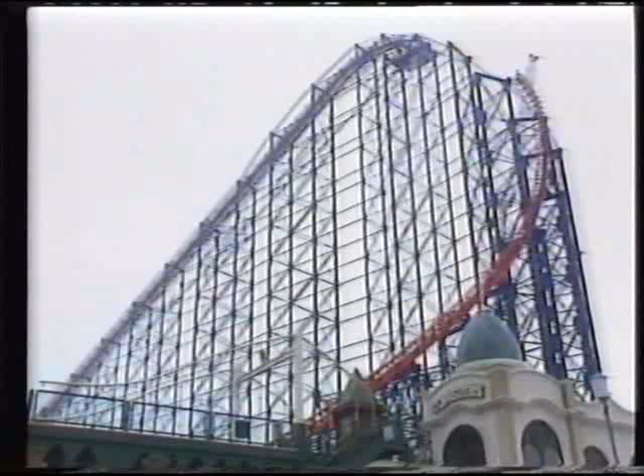It was one man's vision: to build the ultimate ride which would thrill millions. In the late 1980s, Geoffrey Thompson, managing director of Blackpool Pleasure Beach, vowed to show the world that his amusement park would scale new heights of daring. In 1994, the dream became a reality—the year the tallest roller coaster in the world came to Britain.

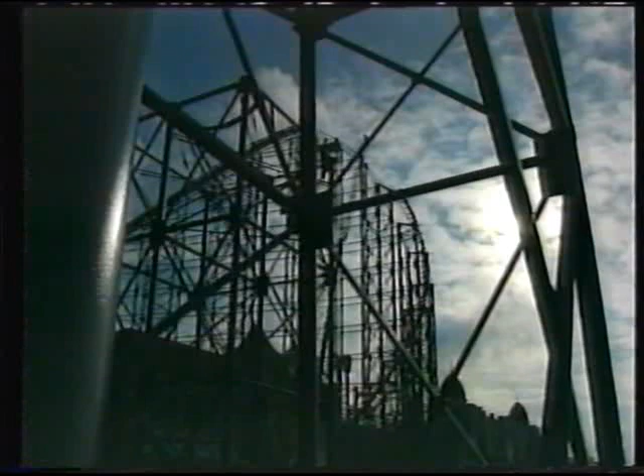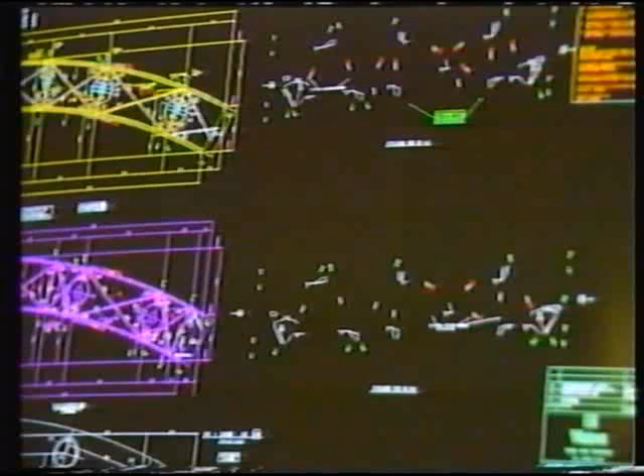Blackpool deserves only the best, and in the world of roller coasters, the finest are designed in America. Using the latest computer-aided design technology, Arrow Dynamics of Utah began creating a unique roller coaster, simply taller and faster than anything ever seen before.

With planning approval from Blackpool Council and the consent of the Civil Aviation Authority, the groundwork could begin. And who better to perform the first turf-cutting ceremony than Britain's tallest and fastest men—7 foot 6 inch Chris Greener and Olympic champion Linford Christie.

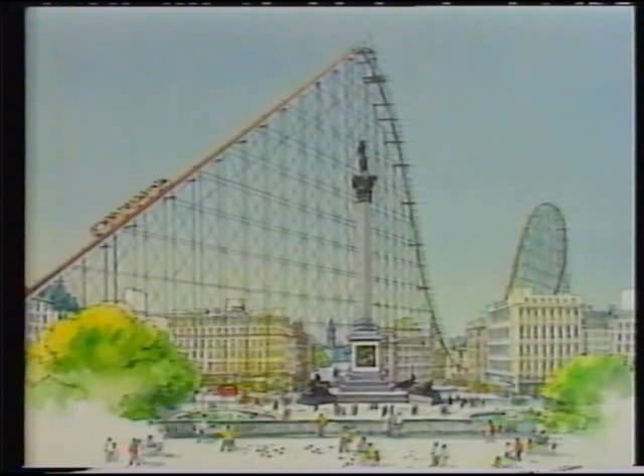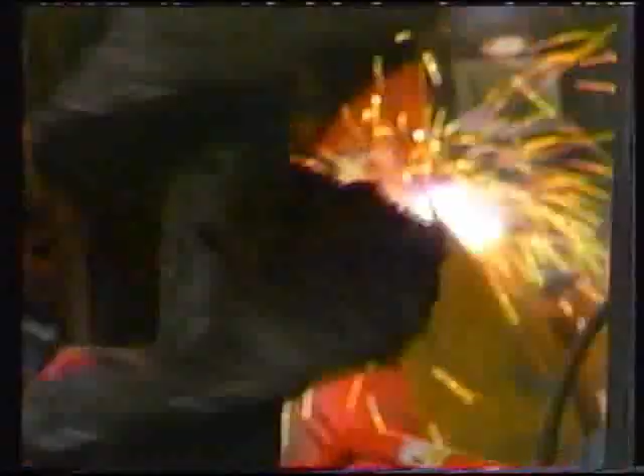The 235-foot roller coaster will be every inch a national landmark. This artist's impression shows how it would dwarf Nelson's Column. Prime Minister John Major, admitting on a visit to Blackpool he was inspired by the concept, said yes, he'd love to ride it. But first, the foundations had to be laid.

Other amusement parks have built their rides on greenfield sites. Here, it wasn't so simple. Somehow, the giant roller coaster's roots would have to be put down alongside the existing 140 attractions in the world's most ride-intensive amusement park. The £1.5 million contract for foundations was awarded to Shepherd Construction Limited of Manchester.

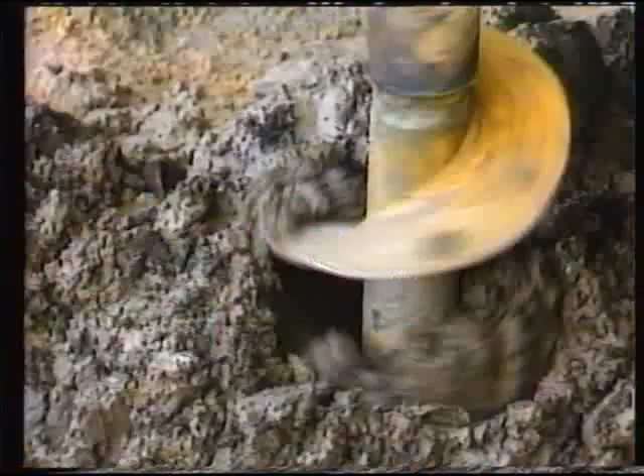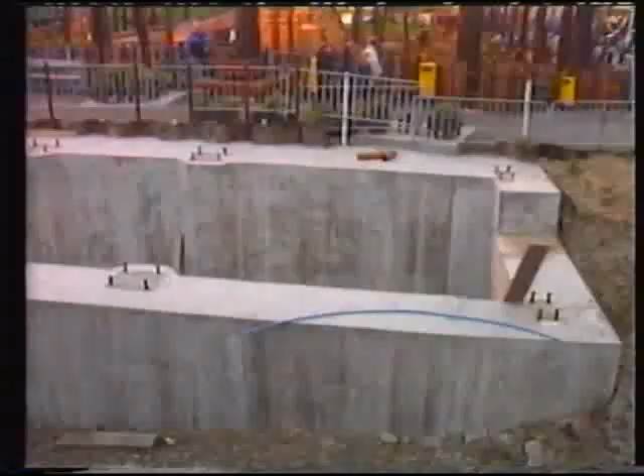The company had to overcome enormous obstacles to sink more than 300 piles. Even when they'd avoided water pipes and electricity cables, they faced the problem of sand. In some areas, they had to dig 45 feet down to find a firm base. The piles were reinforced with steel, and 5,000 tons of concrete was then poured in.

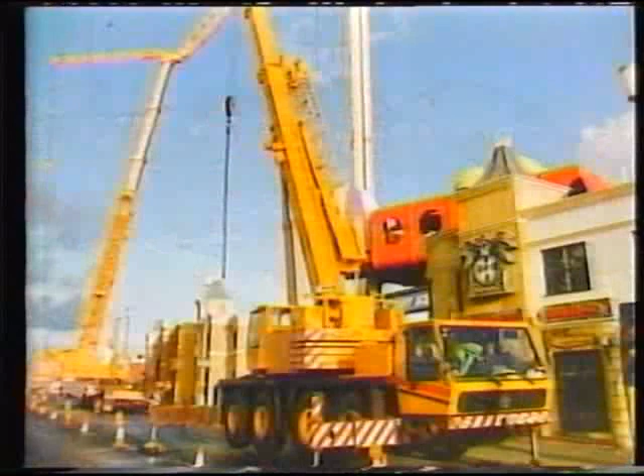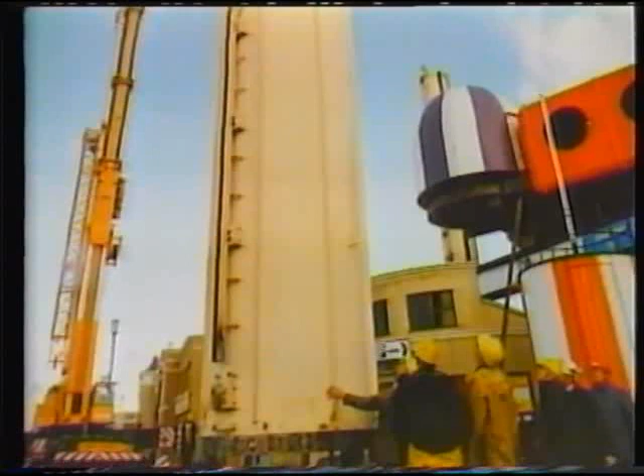Although everything possible was done to save existing attractions, the famous 170-foot Space Tower, erected in the 70s, had to be dismantled to make way for the ride of the 90s. But it has a new home at Frontierland in Morecambe.

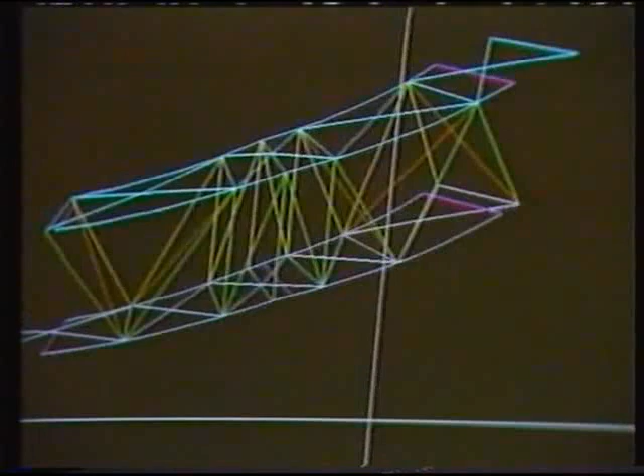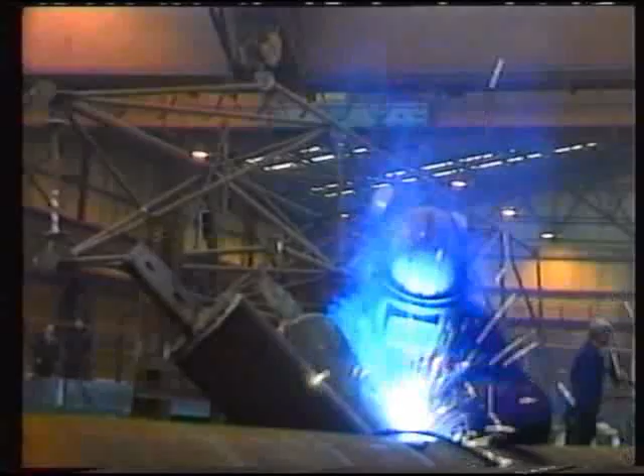With the design and route of the roller coaster agreed, work could begin on the superstructure. The 3D simulations and geometry calculations were supplied on computer disk by Arrow Dynamics and Manchester-based consulting engineers Allott and Lomax. These were then converted into working drawings, from which accurate plans could be drawn up, from which Watson Steel of Bolton could then make the 12,000 individual pieces of steel—2,600 tons in all, as part of a contract worth £6 million.

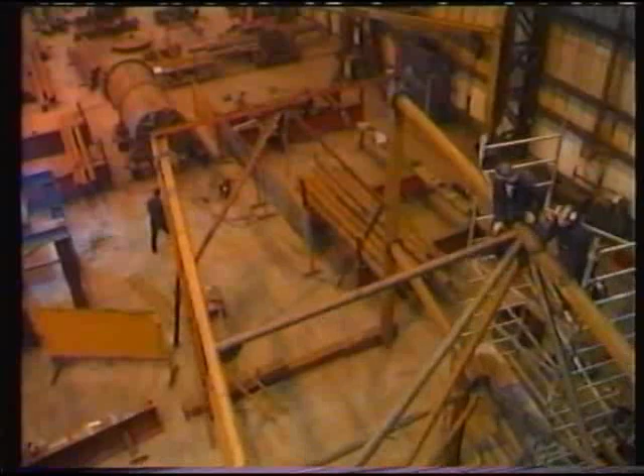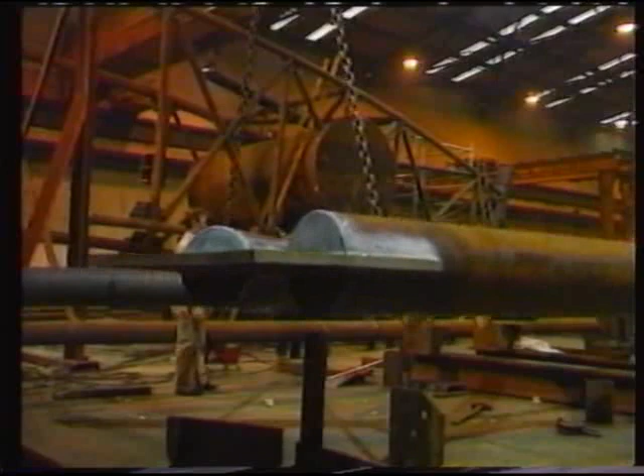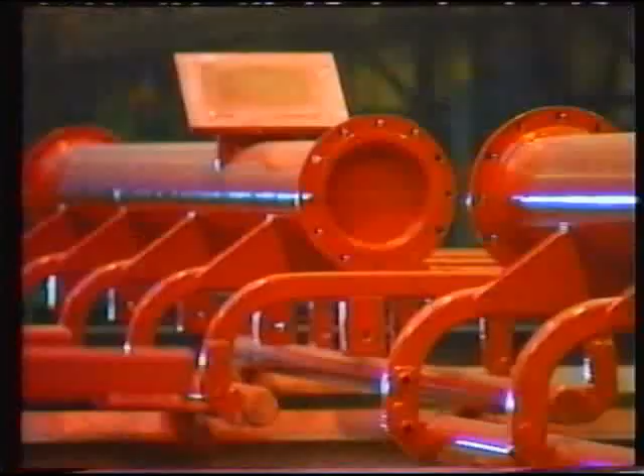The company's vast construction halls turned out enough steel which, if laid end to end, would have stretched 35 miles—from their Bolton factory to Blackpool itself. Here, vast monopod columns, tower legs, stanchions, turns and supports were made. All the steelwork, including the red track sections made separately in Southampton and Scotland, were then painted with high-performance protective coatings to guard against Blackpool's abrasive weather.

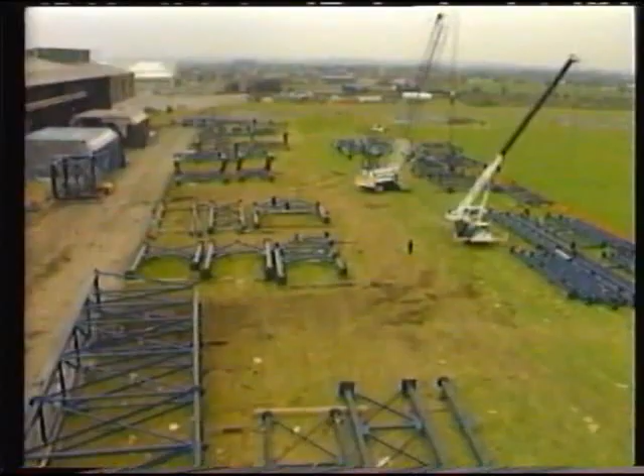There wasn't room at Blackpool Pleasure Beach to take all the steelwork at once, so it was delivered to nearby Blackpool Airport. There, the individual pieces of steel were assembled into larger sections. Gradually, like a giant puzzle, the structures began to take shape. Last checks were made before the steel could be loaded for final delivery to the Pleasure Beach.

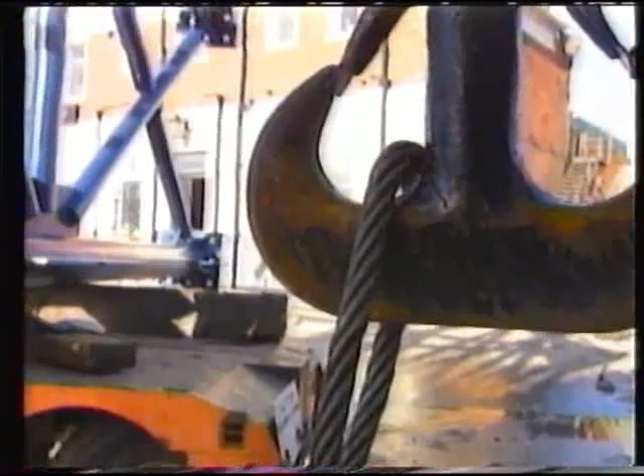The illuminations lengthened the summer season at Blackpool, and not until November are the gates of the Pleasure Beach closed to the public. Faced with the shortest winter closure of any amusement park in Europe, contractors had to erect the roller coaster in record time.

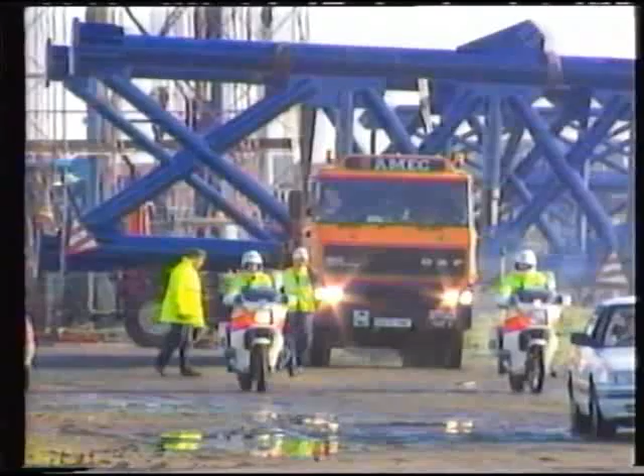Some of the biggest loads ever seen on our roads began to inch their way towards the Pleasure Beach. Police outriders gave each lorry an escort from the airport. They closed the busy promenade and planned alternative routes for Blackpool's busy traffic. The world's tallest roller coaster was on the move.

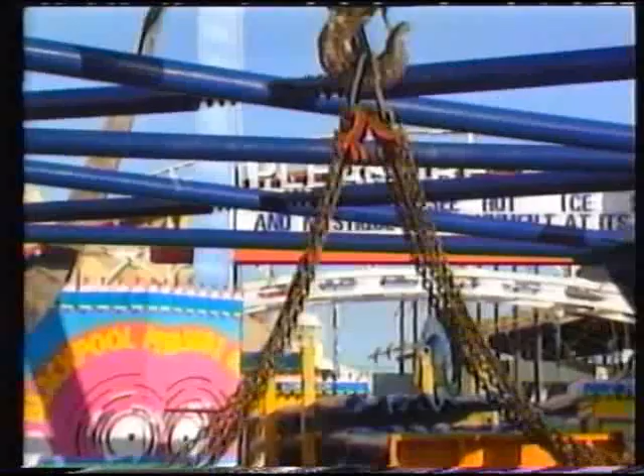A giant crane at 400 tons, one of the largest in use in Britain, was brought in to lift the heavier sections. Each was lifted in order and, with astonishing precision, was then lowered onto its waiting foundation. If any of these supports had been more than 20 millimeters out at the bottom, the track section simply wouldn't have fitted at the top.

Hour by hour, day by day, week by week, and in all weathers, the roller coaster grew and grew. It had to grow to live up to its new name, the Pepsi Max Big One. Blackpool Pleasure Beach announced a 5-year sponsorship deal with the American soft drinks company worth £1 million, believed to be the first ever sponsorship deal of its kind for a single ride.

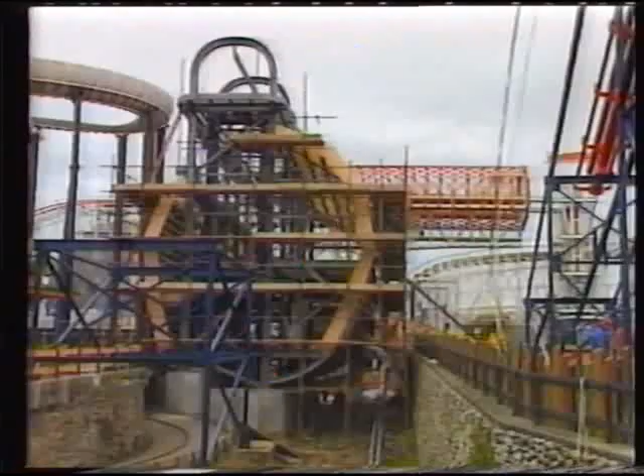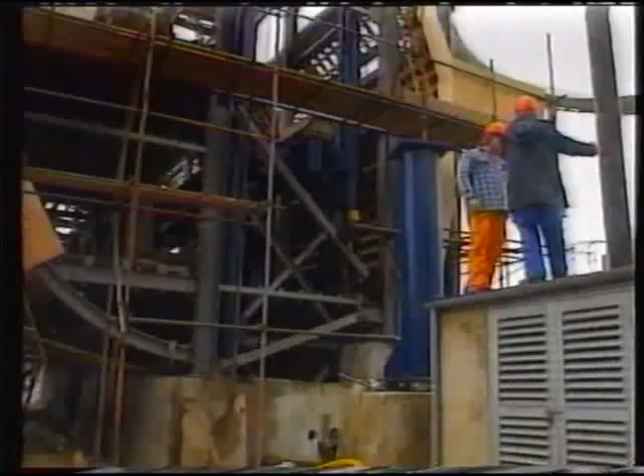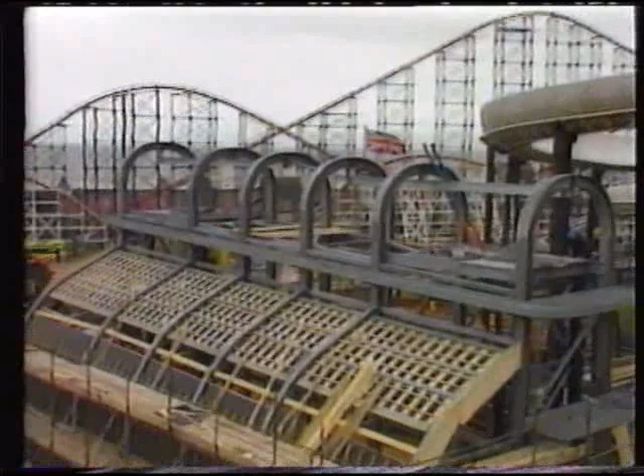Following the design route of the ride, engineers had to cut through the Big Dipper and the old roller coaster to ease the progress of their new neighbor.

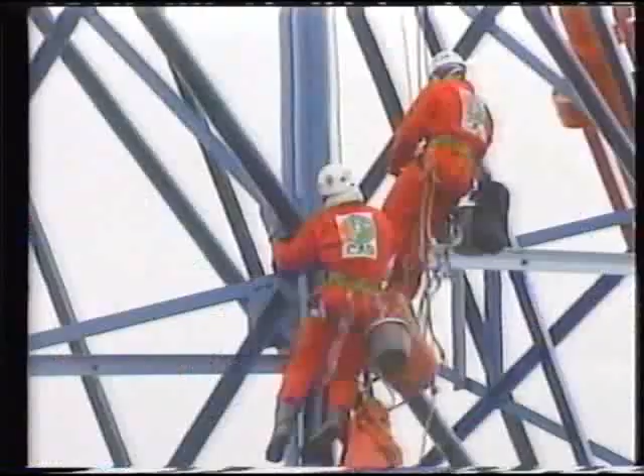Touching up the paintwork requires a head for heights. The world's leading roped access specialists were brought in to coat the bolts and make good any handling damage. Up to 5 layers of protective coatings would be needed.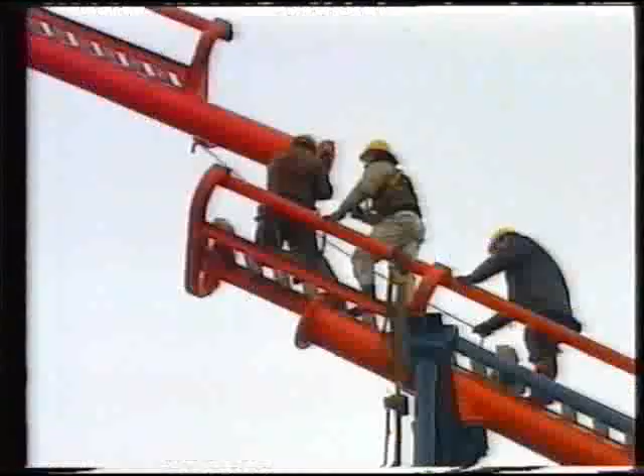As the winter season drew to an end, the activity intensified. Red track sections began to top the route of the tallest roller coaster ever built on this planet.

Geoffrey Thompson believes the Pepsi Max Big One is the most significant single leisure development in Britain since the construction of Blackpool Tower a century ago. He expects it'll attract an extra 1 million visitors to the resort every year.

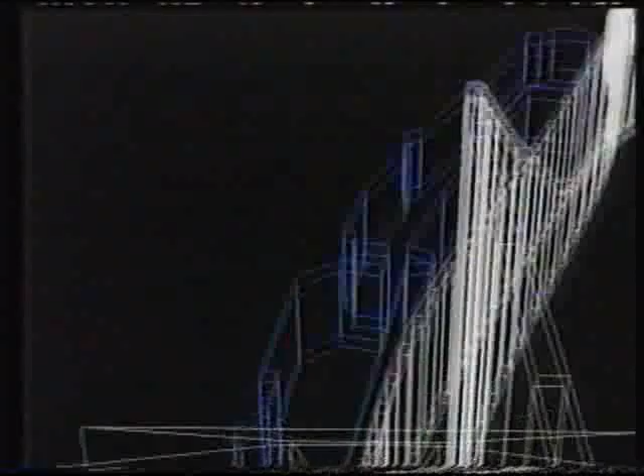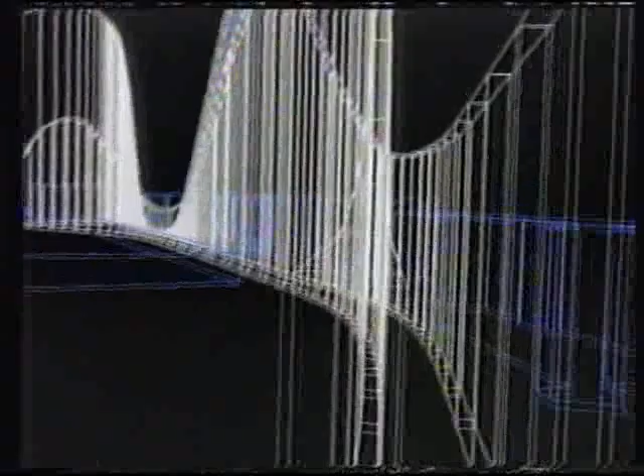For those who dare to plunge from 235 feet at an angle of 65 degrees and ride its 1-mile circuit at speeds of up to 85 miles an hour, it'll be unbeatable. But don't take our word for it—try it, if you dare.